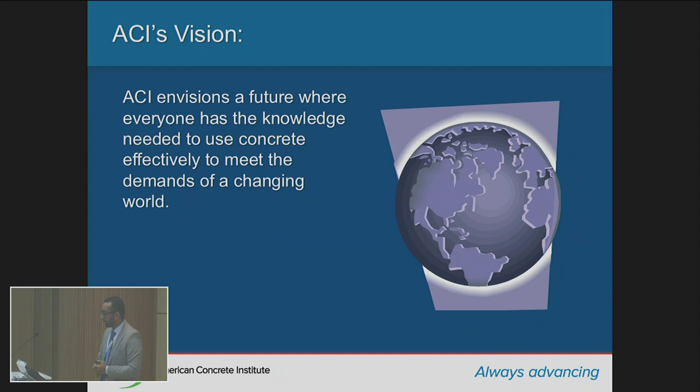ACI envisions a future where everyone has the knowledge needed to use concrete effectively to meet the demand of a changing world.

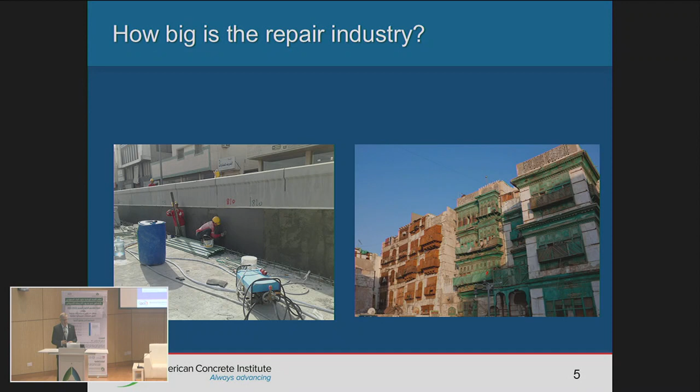So the repair really evolved over many years. Back in the 80s, two studies were published, independent studies, one in the US and one in UK, where people wanted to find out, if we have repair work, how long does that repair work last? Here I'm showing one study done in the UK, looking at about 215 case studies. If you add all those studies, they add up to more than 215, because a structure could have more than one failure or more than one deterioration issue. So a structure would have been documented under more than one cause: could be corrosion, could be freeze-thaw, could be deteriorated concrete, or poor construction.

So here are the structures. Then those structures were repaired using the state-of-the-art at the time of the repair, using conventional methods. And again, a repair could be done under more than one method: could be patching, could be crack injection. So again, it was documented under more than one of those categories. And then after that was done, they observed and checked how long that repair lasts.

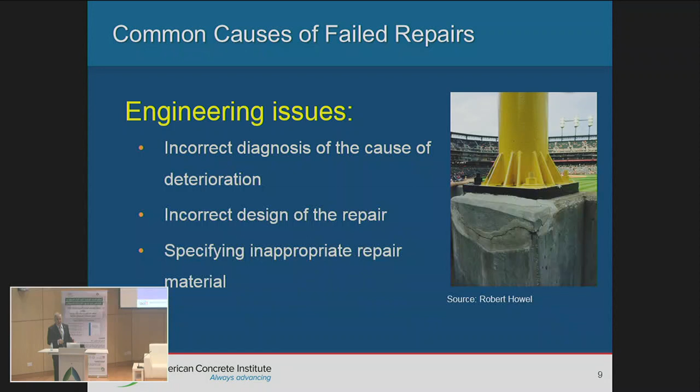The other category they put together was construction issues. Many times the repair is so involved, it's not straightforward. The design itself is not your common design work, so it's non-standard. Sometimes the engineer or contractor would take shortcuts, saying I don't want to follow the contract documents, I want to do it differently.

And I've seen that. One time I was on a job site, and there was this young superintendent. I had prepared the drawings, and I went out there just to inspect. He came to me really happy and proud of himself. He says, I know a lot, I don't really need those drawings to follow, I know how to build it, I don't need to follow those drawings. So I went back to his boss and told him, you better watch over your guy in the field.

As an owner, it's hard for you to see your project or building not working. It's under construction because you're losing revenue. So you want your project and construction to be done like yesterday. So the contractor is being pushed to accelerate the work.

Repair application and workmanship issues. It is also important for the common worker to be trained and aware how to apply that repair work. And we talked about the material differences.

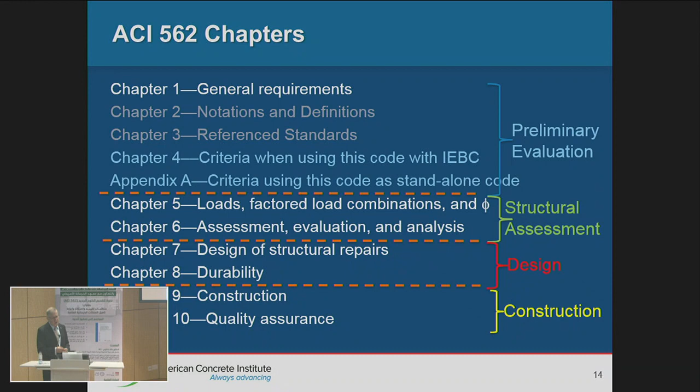Here are the chapters within the code. We have about 10 chapters. You see here, for example, Chapter 4. Chapter 4 is used if the IEBC has been adopted by the authorities. Appendix A is used if it is a standalone code. So the code is divided also into 4 categories. The first few chapters we call the prelim evaluation, where I'm doing the prelim evaluation. Chapters 5 and 6 are for structural assessment, 7 and 8 for design, and 9 and 10 are for construction. I will briefly, because of the limited time, go quickly and highlight what's in every chapter.

This seminar, we give it in the US as over a full day seminar. So here I'm trying to compress the information as much as possible, and I hope I will be able to deliver the message. The intent of any code, any standard, irrespective, is to safeguard the public. It's for the safety and health of the public. That's the first priority of any standard.

The user is the engineer, or in this code, the engineer is mentioned as the licensed design professional. I may be using quite a bit of terminology. What ACI has done is create what we call a terminology explaining what each word means, like a dictionary, but a concrete dictionary. So here's the website address where it's downloadable for free from the ACI website.

The code is applicable to any concrete structure, any building. So it's for foundation, composite members, precast, post tensions. And you see the slab on ground, I have it as a question mark. Slabs on ground are usually, because they are non-safety issues, not considered part of the repair, or the code does not address it. Unless the slab on ground is connected to the structure and transfers, let's say, lateral loading, like part of the lateral system. In that case, or it's a structural slab as self-supported if you have weak soil, then it will be addressed.

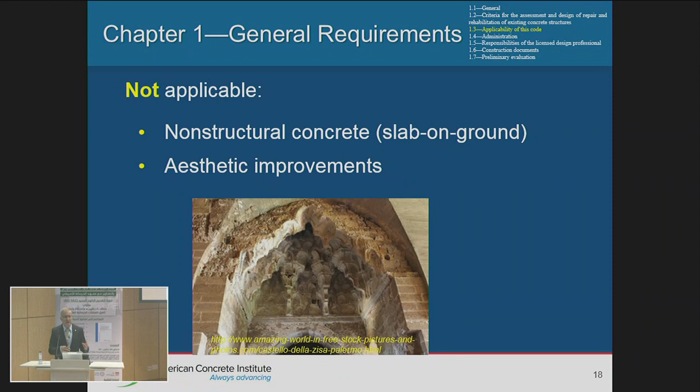But if it's your normal slab on ground, then the code does not really address it. It's also for non-building structures, but has to be concrete, like bridges, tanks, silos, or any concrete structure this code would apply to. It's not applicable to non-structural concrete, or aesthetic improvements, unless those aesthetic improvements may fail, and if it fails, it may hurt somebody. In that case, the code would apply.

Now, if we look at seismic, the code 562 does not address seismic issues for repair. In this case, the code will refer you back to ASCE/SEI 41. I assume everybody here is familiar with ASCE documents? Okay, I see some nodding, so I'm not going to go into it. But ASCE 41, it's also a general document, it's a standard, it's adopted in the IEBC, but in general does not talk about concrete. ACI 369, which is another committee within ACI, did come up with a standard for repair of concrete structures in seismic zones. So ASCE 41 references this document. ACI is referenced in ASCE 41 through 369.

ACI does not want to stifle any advances when it comes to new innovations, construction, design, or analysis. So it allows the engineer to come with new ideas, new methods of design and analysis. But it has to be submitted to the authorities, and the authorities have to approve it.

Otherwise, it's not going to work. So they can show it either by successful use, that it has been used for many years successfully, or by analysis, or by going through a testing program. When I was in California after the Loma Prieta earthquake,

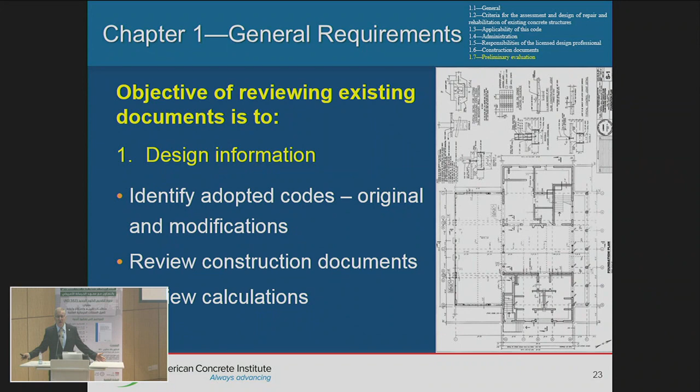Another thing is to also try to collect the material information that was put into this structure. Do you have the concrete mixture components and proportions? Is that available to you? The mill test report for the reinforcement bars. What protection systems were used, and any material that was put into the structure. If you're able to get that information, that will help you in your assessment.

Construction information. Do you have the RFIs, request for information, or any change orders that came about? I was working one time on a project where we had over 200 RFIs. Those would be kept within the company as a reference for future use. Also, any quality control data or inspection reports.

Photos are very important. Nowadays people have those iPhones, they take pictures. If you have those, keep them for your records. Those are very important. There was a project in New York where there were cracks, so the engineer went and looked at the drawings, calculations, and everything looked fine.

But there were cracks, and the cracks really did not match what's on the drawings or the calculations. So it was puzzling. The contractor said, well, I took a few pictures, I have pictures. The engineer jumped at him and said, let me see the pictures. So he took a look, and when the contractor was doing the awnings, they added some steel plates to aid in construction but did not remove them. The cracks really occurred at those steel plates where they had added them. So sometimes photos would help in determining why a structure had failed or cracked.

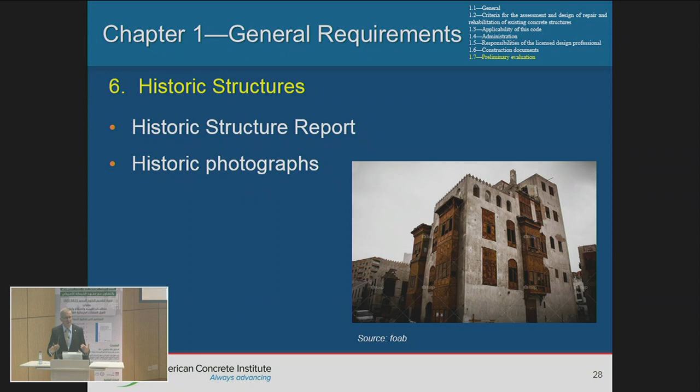Historical structures: as I mentioned earlier, many times we don't have any information on the structures—no drawings, no information, nor photos. In the US, we have what we call historical societies, where they try to gather that information. I'm not sure if such things occur here, but if there's one in existence, it will also be very important to go to those authorities and find out about those historical structures, if there is any information that may help you in the repair if it's needed.

So now the engineer, sitting in the office, has gathered all that information—drawings, reports, calculations—if available, and studied them. Now the next step is to go out and do an as-is check: go to the job site and see what's on the drawings. Is it really what's out there in the field? Do they match? Were there any changes that occurred over the years that were not documented?

For example, member sizes—do they match what's on the drawings? Say the beams or columns were designed as 400 by 400. What's out there in the field? Do they match? Are they 450 by 500, or are they 450 by 350? So do they match? We also have tolerances, right? When we do construction, there are tolerances.

You can also observe if there is any material deterioration. When the engineer designs and the structure is built, you assume everything is to the norms—I shouldn't say perfect, because nothing is perfect, but everything is done as planned. But now, because of deterioration, has the material deteriorated? Are there any signs of distress, like unusual cracks?

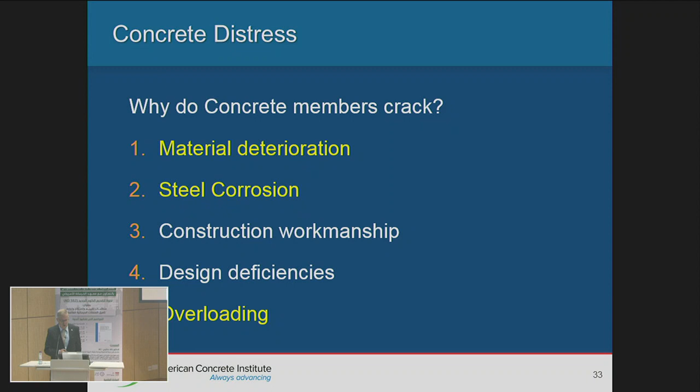So I'm going to step aside a little bit and talk about cracking. Why do concrete members crack? There are several issues: material deterioration, steel corrosion. Maybe you have quite a bit of steel corrosion here on the east and west coast, but I've learned today that you also have it here in Riyadh. So steel corrosion is the number one issue when it comes to concrete repair. We also talked about construction workmanship, design deficiencies, or overloading.

So when we talk about cracking, it's really a very big topic. You may take a full day just to talk about it. So I will only go very quickly and address a few points just to bring the message across. I'll be talking about drying shrinkage, volume change, ASR, and sulfate attack. So in general, why does concrete crack?

I ask, for example, the question - when I'm in the US we say from the East Coast to the West Coast. So if I ask you here, from the East to the West Coast it's about 1,500 kilometers. If you build a concrete highway with no joints, just one continuous placement, and assume there's no friction - just one concrete slab, no friction - and you allow it to shrink, how much do you think it will shrink? Any takers? Just throw a number - 50 meters, 100 meters? It will shrink approximately 600 to 700 meters.

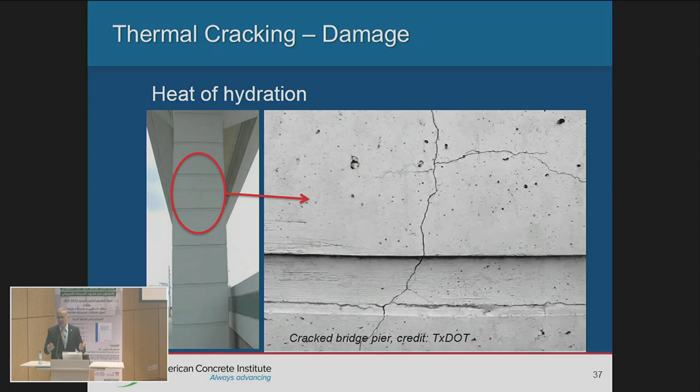We talk about volume change - we have heat of hydration and changes in ambient temperature. When we talk about heat of hydration, it's mainly mass concrete. You see those because the inside of the concrete is still hot, the temperature is hot, whereas the outside, which is in contact with the environment, cools down, so the concrete cracks. There are ACI documents that talk about the requirements of limiting the high temperature and the difference between the external and internal temperature in concrete. There are other methods of how to mitigate those cracks, as talked about here, with the thermal gradient.

The way you find out you have ASR is that gel deposits around the cracks, what we call efflorescence-like gel. This occurs when alkalis react with the silica, creating around the aggregate what we call the alkali silica gel. If there's moisture or water within the mix, or from outside, that gel expands. When it expands it takes volume, and that volume needs space, so it pushes against the concrete and you get those cracks.

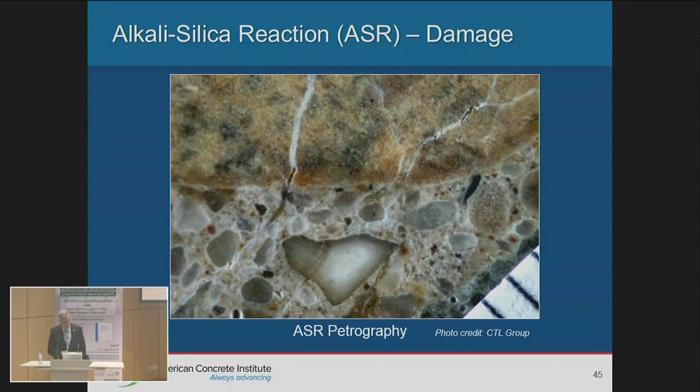Here's a petrographic picture of concrete, and you see that white deposits, or that oozing of material, goes out to the top of the concrete. Now, sulfate attack.

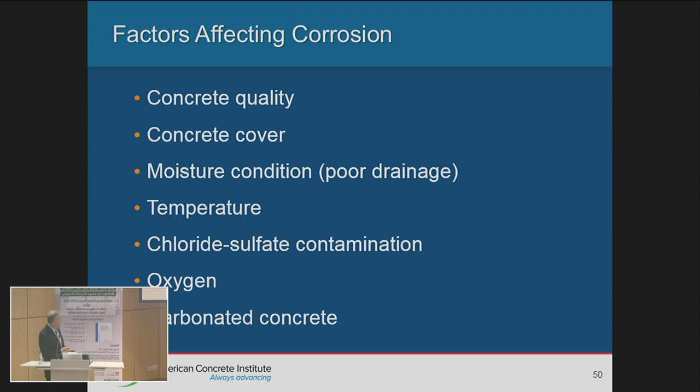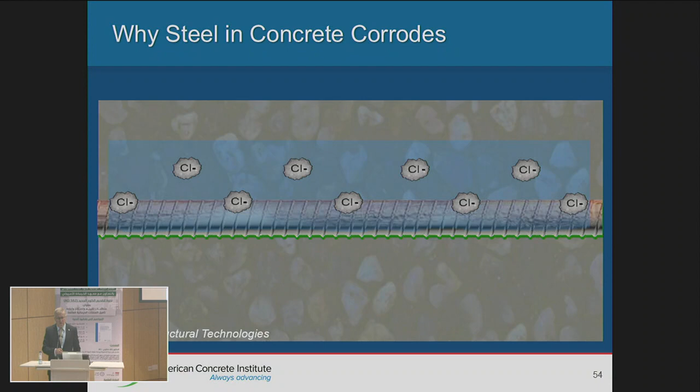If I ask you how fast does carbonation penetrate the concrete - it's about 1 millimeter per year. So if you have 25 millimeter cover, you'd assume about 25 years, give or take, if you have no cracks. If you have good concrete cover, good concrete, it may take 25 years for that carbonation to reach the steel bar. The same thing with chloride - chloride enters the concrete, attacks that film, and the steel bar will corrode.

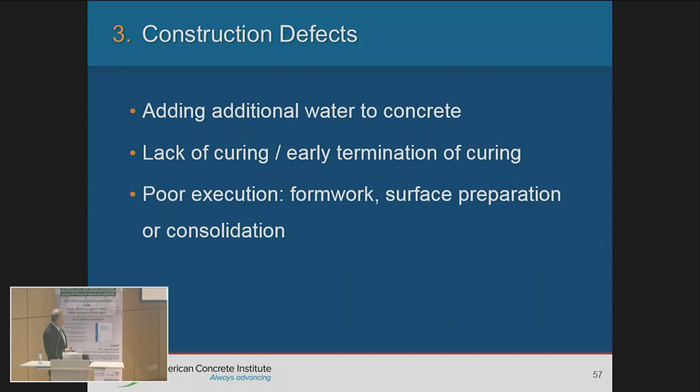Poor execution - here, for example, are pictures I received at the headquarters from a contractor. The engineer told me, 'we removed the forms, and that's what we found. What should we do?' It's a tough issue, right? What should be done? Or when you build and the tolerances are not properly done, not properly erected - those are issues that need to be addressed right up front. So that ended up being quite costly for the contractor to repair.

Sometimes you have design defects. Most of the failures we see are mainly due to shear. Has anybody seen a failure due to flexure, like a beam failing in flexure? Through my experience, I haven't seen any, because flexure is usually properly designed, but shear is still that unknown. Most of the failures that occur are actually based on punching shear.

Last year, there was a failure in Florida, maybe you've heard of it, during construction at the Florida International University. They were putting in a new bridge, still under construction. They were stressing it when it failed over the road. Unfortunately, a few people got more than injured - they passed away. So what they found out is while stressing, the engineer... it's still under litigation, but so far everything is hinting towards poor design.

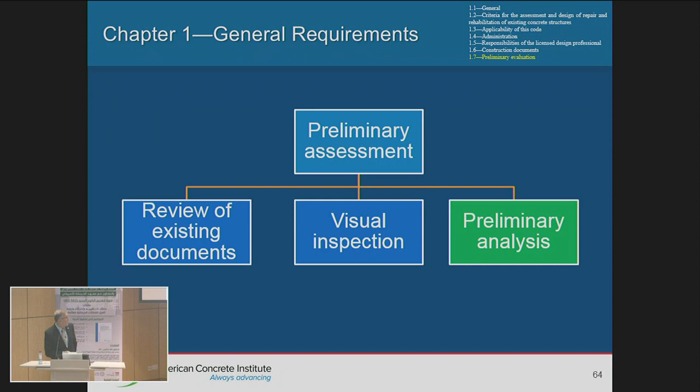As mentioned earlier, when we do our prelim analysis, we are allowed to use either the original building code, if we know to what code the building was built or designed to, or we can use the current building code. You have to check with your jurisdiction, your building department, what code are you using? For example, what code are you using here - 318.14? Okay, so it's the 14 version, so you can use this version.

Or you can go to Appendix A. I will quickly and briefly touch on this Appendix A without going into too much depth, because that takes some time.

The difference between current and original code - it could be that the structure was built to the 1971 code, so it's a different version. The 14 version now has more information, maybe different equations. It's being updated. So when you check your structure based on the original building code, you don't take this updated information into consideration, because the structure, when the engineer built it based on, let's say, 1971 code, did not have that information at that time. So you only design or check it for that information.

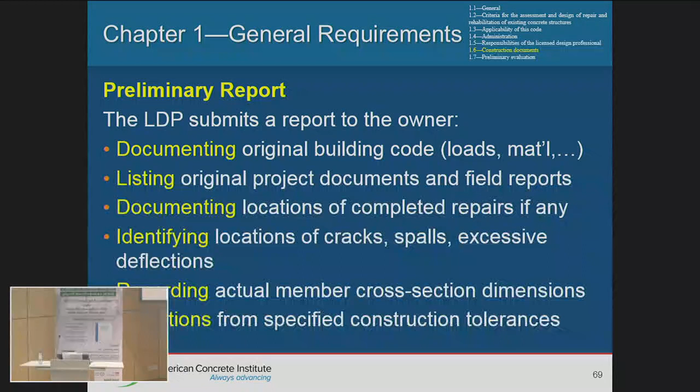Question: when you say it's beyond repair, this will cost a lot of money - so are we going to take the first decision, or do we have to get another opinion before making a decision? Okay, the question is, when I said the structure is inadequate and beyond repair...

The question is, would you just go with that as the final decision, or would you go to a second opinion? When it comes to an engineer taking that decision, he has to be experienced, has to have the know-how, and has done quite a bit of repair work. So yes, you may ask for a second opinion, but as an engineer it's your obligation to determine if the structure is safe or not. And if it's not safe, you can take it out. But yes, you do some investigative work, and I will go into it later. That is just preliminary. The owner may say, why don't you do more investigative work? And I will go into that later.

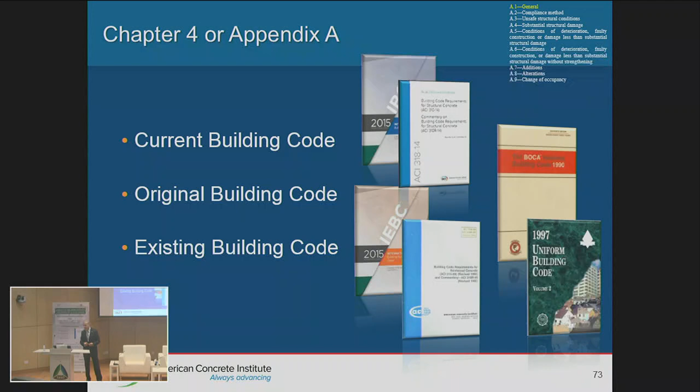Determine the design basis code. I'll go quickly over this, just to give you an idea what code to use. As I mentioned, if the IBC is used, then Chapter 4 is not used, we use Appendix A. This code talks about the current building code, which is the code adopted by the building department. For example, here in the Kingdom of Saudi Arabia, it's the 31814, that's what is being adopted here per my understanding. Then you have the original building code, which could be the UBC, the British standard, the Eurocode, or any standard to which the structure was originally built. And we also have the existing building code, which could be the 562 or the IEBC.

So what is the design basis code? It is defined as the legally adopted code requirements under which the assessment, repairs, and rehabilitation are designed and constructed.

In that chapter we have different categories. For example, we have unsafe structure. What constitutes an unsafe structure? We all know the demand capacity ratio. It tells you if your demand capacity ratio is greater than 1. What capacity are we talking about here? We're talking about the existing capacity, not the original capacity when it was designed, because now we are in a new situation with this structure — we have some deterioration, or we're looking at the actual member sizes. So we look at the capacity based on the current building code, the demand based on the current building code, and the capacity based on the original building code. And if that ratio is greater than 1.5, then my repair is based on the current building code. So then we use the current building code. And as I mentioned, if the structure is unsafe, it has to be reported to the owner and building official as a first step.

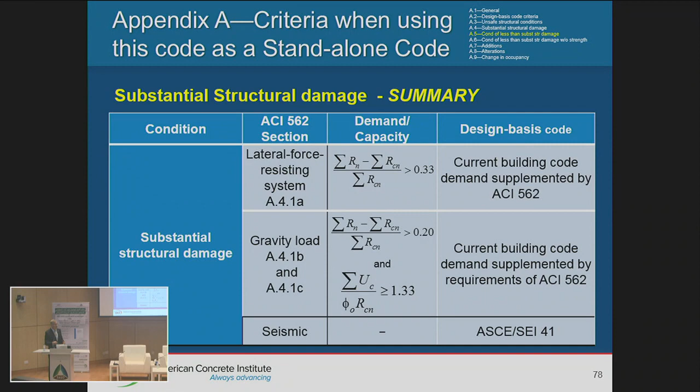So then we go to current building code. For seismic, as mentioned earlier, we go to ASCE 41. Now if we have less than substantial structural damage - if my demand capacity ratio based on the original code is greater than 1, but less than 1.2 or 1.33 - then I can go to the original building code. I don't have to repair my structure to the current building code, which may be expensive or cost prohibitive. Or if it's minor cracking, then I just need to do minor repair.

If you look at additions, alterations, change in occupancy, we do that a lot, right? An owner wants to add one more floor on top, or wants to make changes, add a few bays to the structure, or change a building from an office to a storage, or from residential to an office. So we all know that the live loading will change.

So in this case, the code tells you, if you look at the demand with the addition based on the current code, and it's greater than 5% of the demand of the original building code, then the structure needs to be upgraded using the current building code. There are several issues that you need to check, which would either result in going to the current building code or using the original building code.

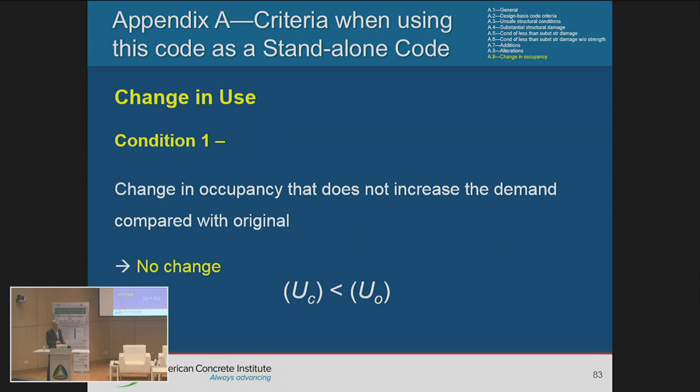If we change occupancy, and the demand based on the current building code is less than the demand based on the original building code, then there's really nothing to be done. Otherwise, we'd go to the current building code.

Now, any new material that you add to your structure, being beam or column, needs to follow which code, do you think? It needs to follow the current building code. So any new material, any new element, any new member that you add to your structure needs to follow the current building code.

You as an engineer may elect not to go through that exercise I showed earlier, of deciding whether to use the current building code or the original building code. You could just forfeit everything and go to the current building code directly. But as I mentioned earlier, that may be expensive, may cost the owner quite a bit of more money.

Let's talk quickly about the load factors, and then we'll take the break. That will take probably 10 minutes.

One thing is that you don't want to mix and match between load factors and reduction factors, because those load factors and reduction factors are calibrated based on statistical analysis to get a certain safety factor. So if you are working the structure, checking it, look at the original building code and the current building code together. Don't take, for example, the load factors from the original building code and the reduction factors from the current building code, because then you have an issue.

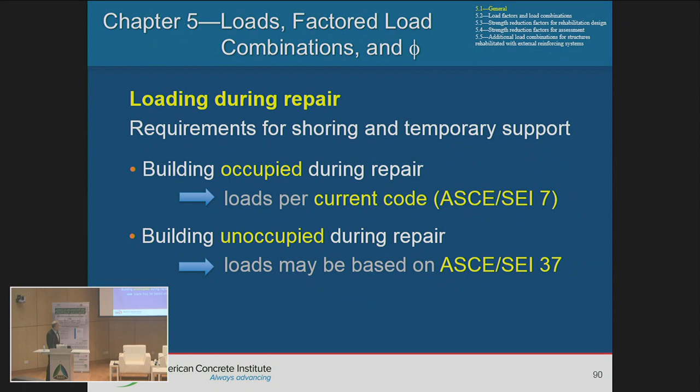And seismic, it's 41. Again, when we're looking at demand capacity ratio, we need to satisfy this inequality. We have two reduction factors in the code, here in 562. We have this reduction factor, which is based on no testing, no providing any evaluation. Or if I'm doing testing, if I've tested the material, I know my cross-section, my member sizes, then the code, because now I have higher reliability, I'm actually working with the actual member sizes and actual material properties. The code increases those reduction factors because of higher reliability.

The code allows for external strengthening, being post-tensioning or FRP. So the code here now allows FRP for external strengthening. If we look at post-tensioning, we have what we call direct attachment to the concrete, so we have positive attachment. But when you look at FRP, it's based on epoxy, so there are issues with non-mechanical strengthening systems. So the code has two requirements that need to be satisfied in order to use the non-mechanical strengthening system.

One of them is this first equation, the S stands for snow. You don't have snow here, so we have to take this equation out. But look at the other equation: without strengthening, so without the FRP, the structure has to maintain this load, the 1.1 dead load plus 3/4 the live load. If it satisfies this without the FRP - because if you have the FRP, you may lose it due to vandalism or whatever reason - you need to make sure the structure can still maintain sufficient load to alert the owner or occupants that something is wrong so they can take emergency action.

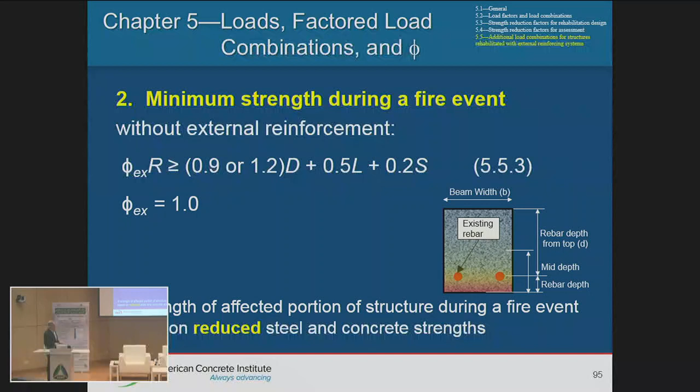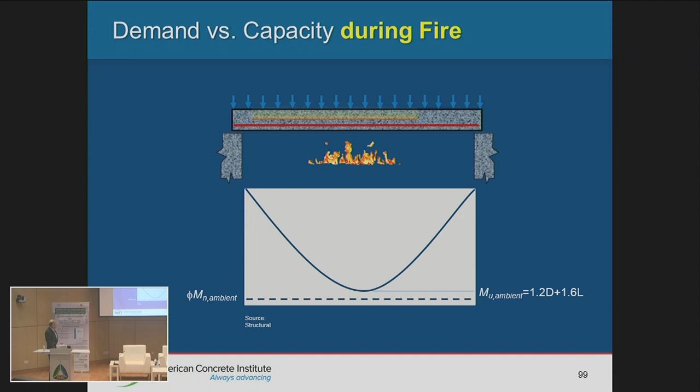Beyond that, there is also deterioration. So let's take a quick look at this member. When we design, your demand is this graph, which is 1.2 dead plus 1.6 live, and your capacity is per the code as shown here. If we have fire, the capacity decreases, it reaches here. As mentioned earlier, in order to use the FRP, you need to maintain a demand such that when you lose your FRP, the structure can still maintain this load. Any questions to this point?

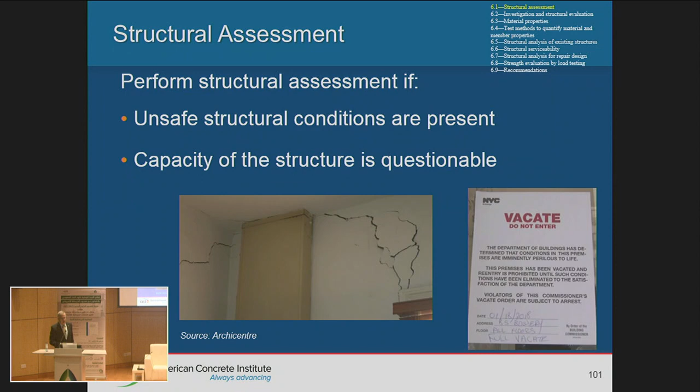So now let's go into Chapter 6, although he says Module 4, but we'll talk about Chapter 6. We'll talk about assessment, evaluation, and analysis. Again, we need to perform structural assessment if the structure is unsafe or if the capacity of the structure is questionable. So when you look at the structural assessment, we have in-place conditions, we do the evaluation, and then the rehab strategies.

We talked about review of available documents, and we did the visual survey. Now, what about the material properties? How would we go about those? How would we determine what are the actual material properties in the structure? Do we do destructive or non-destructive testing? And how do we perform the analysis?

So one thing is, if we're looking at the structure and we see deterioration or distress in the material properties, then there's only one way to do it, and that's by doing physical testing. Because whatever the drawings tell you, well, the concrete strength is 40 MPa, it doesn't really do you any good because the concrete has deteriorated. So you need to find the actual material properties.

If it has not deteriorated, then you have two options. If you have the actual contract documents, you can use whatever material is listed on those documents, but preferably do the physical testing because, again, you will get the as-is condition. We all know when we place the concrete, it will gain strength with time, right? So we need to find out the actual concrete strength.

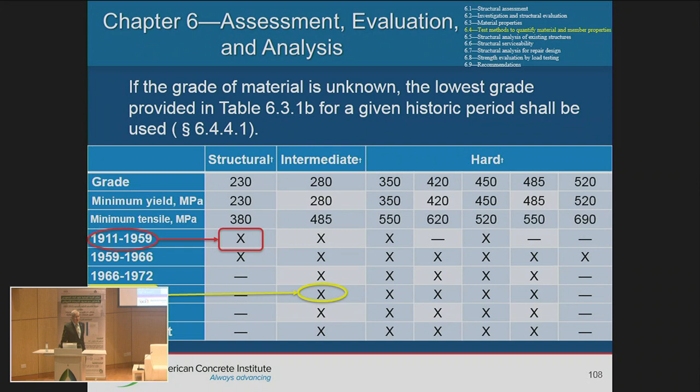Or doing destructive or non-destructive testing. The code allows both - actually, let me rephrase that. Non-destructive testing by itself is not acceptable. You cannot rely just on non-destructive testing. You have to do destructive testing, and then you calibrate your non-destructive equipment against those actual tests that were performed.

So if you look at in-place concrete strength testing, usually those methods are quick, easy to do, and don't take much time, and are inexpensive. But calibration is required. For example, if we take the Rebound Hammer, it's inexpensive - the advantage is it's inexpensive and a quick method. But you know it's very unreliable. It depends - if you apply it vertically or at an incline, it would give you different test results.

If there are different types of cement, and if you hit the cement paste versus the aggregate, it will also give you different test results. So this tool may be good to provide a comparison between the material in this location versus that - so it's just a comparison between different material within a structure, but it does not give you the actual concrete strength.

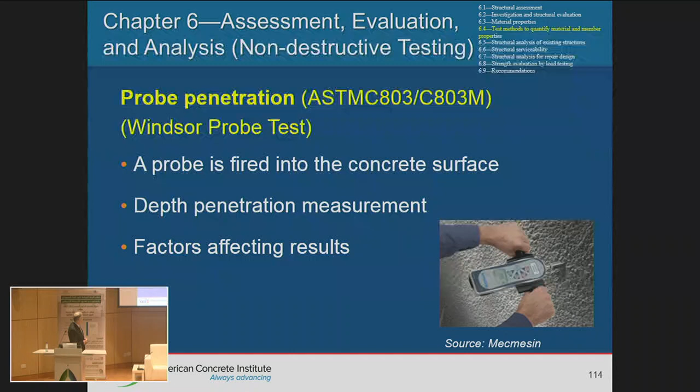The advantages are that it is simple to operate, it's durable in maintenance, and it's insensitive to surface condition.

The limitations are that your member has to be a minimum of 100 millimeters, and it's not recommended for lightweight concrete, nor for strength lower than 28 MPa. Also, don't use it on edges and corners.

Do you know why, or can you guess why not? Because you're shooting that pin right into the concrete, you may spall it or you might crack it.

So that's also another method that is quick. And as I mentioned, those are acceptable only after you have calibrated it. So you cannot use it just by itself.

You take cores, you test those cores, you get your actual concrete strength, and then you calibrate that equipment against those tested cores. Next is the pull-off test.

That is one of the most used methods to test overlays. So if you have an overlay, you get what you call the direct tensile strength.

You have this cylinder where you adhere it to the concrete, then you drill around it, and then you pull. You'd like to have your failure within the substrate, which is the existing concrete.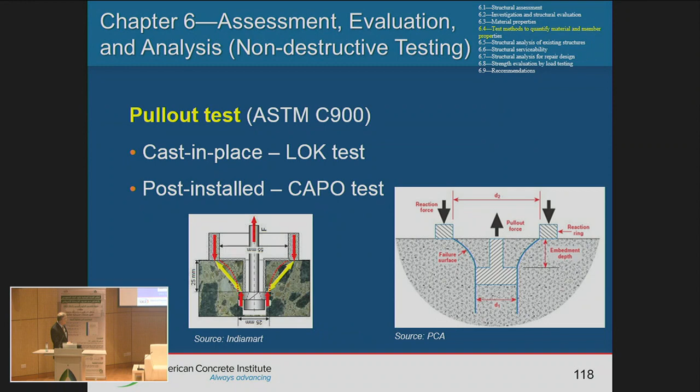And there is the chart that you get from the manufacturers, which will determine your concrete strength from your pull-out force, and that will reflect your concrete compressive strength.

You also have the stress wave method, where you have the input here and the receiver here, and that will give you an indication of the approximate in-place strength, whether you have corrosion in your bars or not.

It can also tell you if there are any voids, honeycomb voids, or indicate the member thickness.

This is a very old method. Do you still use that? What you call chain dragging - is it being used here? It's being used quite a bit in the US to find out, on bridges, any delamination.

You take a chain and you drag it over the bridge, over the road. It's inexpensive, it's just done by labor, but just by the sound of it, if it gives you a hollow sound, that means there is delamination.

Again, it's simple, its mapping is not that difficult, and the training required is limited, not much of a training. And it's quick. The disadvantages are that it cannot pick up the onset of delamination.

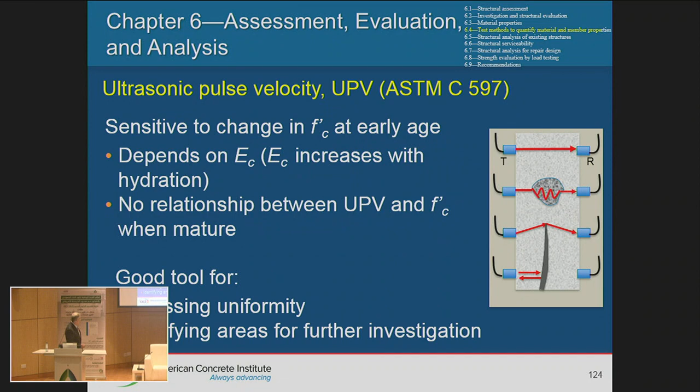Or if you have a crack, same effect. Here's a picture showing where you have the transducer, here's the receiver, or vice versa.

And it's affected by the aggregate type, amount of aggregate, and the bar layout. Bar location is always important to know when you're doing any repair, to determine where your bars are, right? And a quick, easy, and inexpensive instrument for that is the cover meter.

So with the cover meter, it's not usually that easy to determine what you call the bar size. Unless, for example, you chip a little bit, you determine your depth, and you find out what your bar diameter is, then based on that relationship, you can determine the other bar sizes by estimating it.

The advantages: high accuracy, not influenced by moisture, and actually low cost. The limitations: if your bars are at a depth greater than 100 millimeters, or if you have multiple layers of bars, it cannot identify that. Also, if you have a lot of bars, determining the size and spacing of those bars may be difficult.

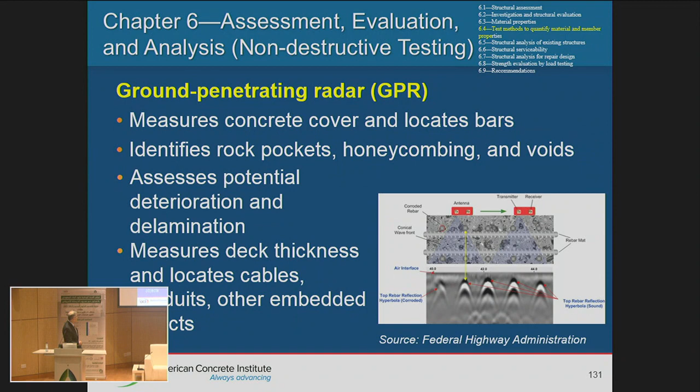So that will give you sort of a map of the whole layout of the reinforcement. It's fast, reliable, and repeatable.

The limitations: again, it requires trained personnel, so the people doing it need to be trained on that equipment. Weather, if it's cold - you don't have that issue here, you don't have de-icing - may also affect it. And it's influenced by depth and spacing of bars. Again, if the bars are deep below the surface, or if they are closely spaced, that will affect the reading.

Durability of concrete - we talked about carbonation. If you take a sample and apply this material, the phenolphthalein test, on the core, if it changes and becomes colorless, that means there is carbonation, and you can determine how far the carbonation has penetrated into your concrete. But if it turns pink or reddish, that means you don't have carbonation in your concrete.

Again, going back here, we have quite a bit of documents, ACI documents, that talk in much more depth about those tests, how to perform them, and the advantages and disadvantages of those tests.

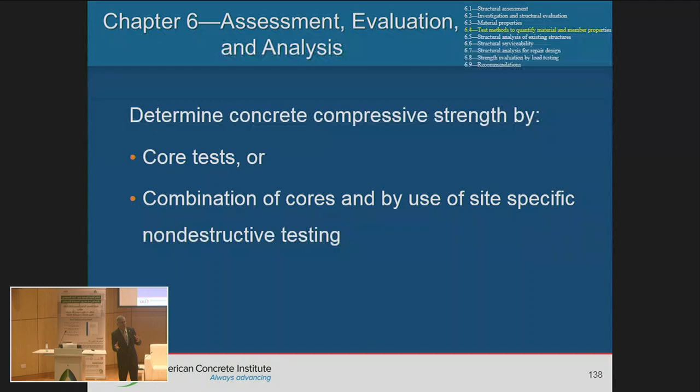Let's take a look at destructive testing. As mentioned earlier, destructive testing is the only method acceptable in the code, but you can supplement it with non-destructive testing. So non-destructive testing by itself is not acceptable, but you can correlate between the non-destructive and destructive testing. The code actually encourages doing non-destructive testing after you have done some destructive testing. The reason is, if you just rely on destructive testing and take a lot of samples, you may jeopardize the integrity of your structure - it becomes more like a Swiss cheese, because taking too many samples will weaken your structure.

So cores have to be taken from sound concrete. If you see a crack, don't try to take your cores where the crack is just to see what's exactly there - no. When you take your cores, take them away from cracks, where you have sound concrete - that's where you take your cores from. Locate your bars before taking your cores; the core should not include any reinforcement. And when it comes to concrete, use a minimum of 3 cores. If you take the cores, let's say in a column or wall, where would you take them - from the top, bottom, or from the middle?

Any volunteers? Where should you take the core, and why? The middle is right.

Middle is correct. What they found is that if you take it at the top, your concrete strength is about 15% lower. If you take it at the bottom, it's about 10% higher. Why? Because when you place concrete, most of the aggregates settle below, giving denser, stronger concrete at the bottom. At the top, you don't have much aggregate, so you have lower quality concrete. So the best place to take your cores is the middle.

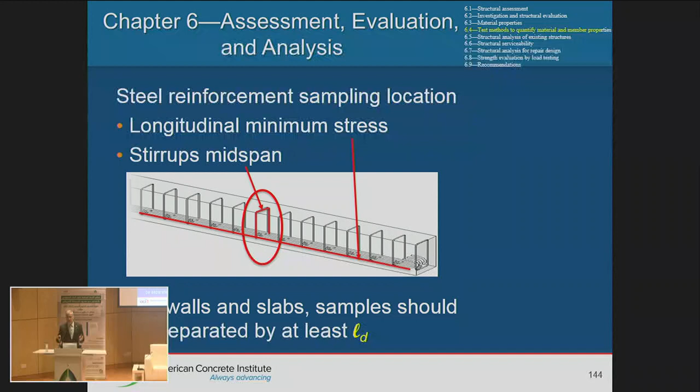For walls or slabs, if you take samples from 2 or 3 bars next to each other, keep a difference of about the development length between them. Take a minimum of 3 samples from different segments and from the members being evaluated.

For steel, we also have an equation shown here, with Fy bar being the average from the samples you've tested—that gives your equivalent yield strength from that equation. I won't go into detail, but again, with a very high number of samples, your equivalent yield strength would be about 85%.

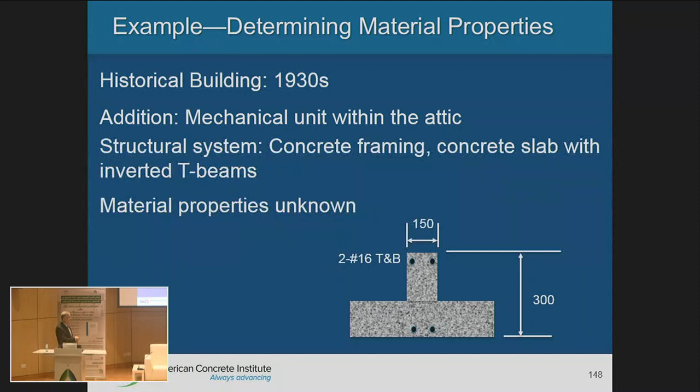Let me take an example and show how we use these equations with the reduction factors. This is an actual example: a structure built in the 1930s, an inverted T. Nothing is wrong with the structure, but the owner wants to add a mechanical unit. As I mentioned, there are no drawings, nothing. So they came in, measured the member sizes, used a cover meter and chipped away, and found 2 number 16 bars top and bottom. Material properties are unknown.

So the engineer has to do some evaluation. Rather than jumping directly into testing, he said: let me check with the historical data first. Am I fine? Do I need to go further? If my analysis with historical data shows the structure is fine, I can save the owner the hazard of doing destructive testing.

So I went to that table. It was built in the 30s, so the concrete strength is 14 MPa. Going to the steel, again from the 30s, the lowest yield strength is 230. Because he hasn't done the actual material property testing, although he checked the member sizes, we use the lower reduction factors: 0.9 and 0.75 for flexure and shear, respectively.

If I calculate my demand capacity ratio based on the historical data, it's 0.9—less than 1, which means the structure is okay, safe, and satisfies the original code requirements. But when I added the new unit, it came out to 1.27, much higher. That means I need to reinforce the structure.

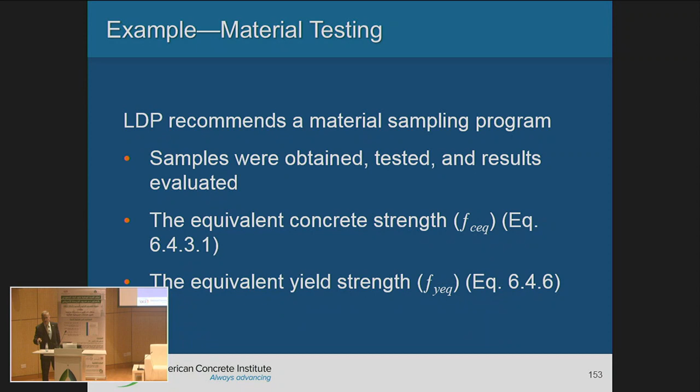Rather than going in and strengthening the structure, the engineer said, let me do some testing, let me go through a testing protocol. So they took 8 samples, and found the average is 42.9. Using those values, the equivalent concrete compressive strength was 35. If you look at it, it's more than twice the historical data. So with the testing, you get a little bit of advantage.

Now let's go to the steel. Took 4 samples, and the equivalent yield strength is 229, which is very close to the historical value, which was 230. And by the way, this is an actual project.

Now going back, because I have the actual member sizes and I determined my material properties, now I can use the higher reduction factors. See how the code now works? Because I have my material properties and my member sizes, I can use the higher reduction factors. Now I did my demand capacity ratio, it's 1.06, so it's still greater than 1.

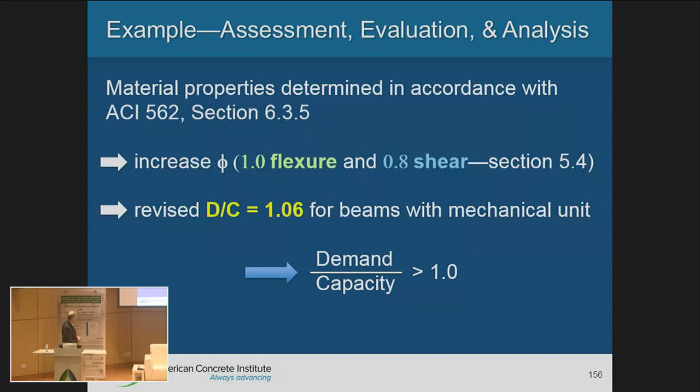If you remember when we talked earlier in Chapter 4 about determining the design basis code, if we have a change in capacity and an increase in loading, then we use the current building code. So the engineer now is justified to strengthen the structure. But rather than strengthening it to the level of 1.27, the engineer now only needs to strengthen by that difference of 6%. So the strengthening is much less.

But because it is very close to 1, the engineer said, if I use more test data, I might improve my probability. As you remember, we have that K sub S or K sub C. With an increase in samples, it will decrease, and give me a higher equivalent number. For the steel, with 4 samples it was 2.3. Now he took 2 more, taking it to 6, so that K sub S dropped to 1.7, and the equivalent yield strength increased from 230 to 248.

So doing my design capacity ratio, it's less than 1, and I don't need to do any reinforcement anymore.

So what did the engineer do here? He not only saved the owner a lot of money, which makes the owner very happy, but also saved downtime, because when the structure is closed, the owner is losing revenue, losing money. So by going through this exercise, maybe it did cost the owner a little bit of money for the engineering and for the testing, but overall it saved the owner a lot of money when it comes to repair work, because that's costly. On top of that, it also saved him downtime because the structure does not need to be closed.

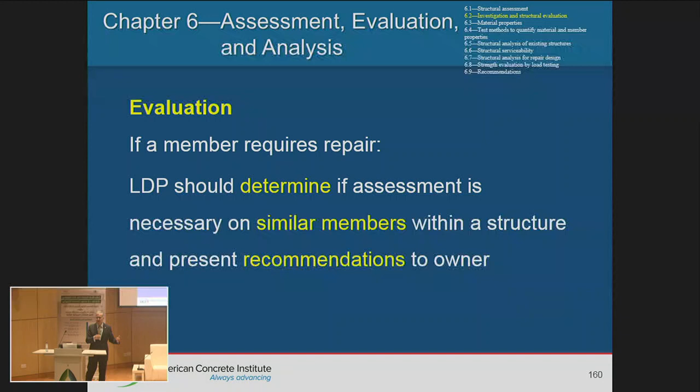We'll have to evaluate the different causes of failure, look at all the remedial measures, and also predict the future deterioration of the repaired or unrepaired structures. So if a member requires repair, the engineer also has to determine if similar members need to be repaired. Maybe the deterioration or distress is in that particular member, but other members with similar design, similar capacity, similar loading - do those also need to be repaired? That's also a judgment call by the engineer.

Let's talk about rehab strategies. We talked about those different steps. Now we need to perform the analysis. So when the engineer performs the analysis, many times the engineer would go, well, here I have the drawings, I have the member sizes, and they model them as is. Well, what the engineer needs to do when doing the analysis is to reflect what's actually there in the field.

Needs to model the actual structure. If there is any cracking, we'll need to show that there is lower stiffness. If they have any additional members, added columns or removed columns, all those need to be reflected in the model, putting in the as-measured dimensions and the actual material properties. So the model has to reflect the actual structure that is existing.

Also, if there were any previous repairs to the structure or modifications, those need to be included. You have to have that continuous load path.

When you're doing the analysis, you have to check how the repair is going to be performed. You have to look at the construction sequences: adding material, removing material, reducing member sizes. For example, if you're repairing a column, you first have to chip and remove some of the material from the concrete, which reduces the cross-section. That needs to be shown or reflected in your model, those different steps as you progress.

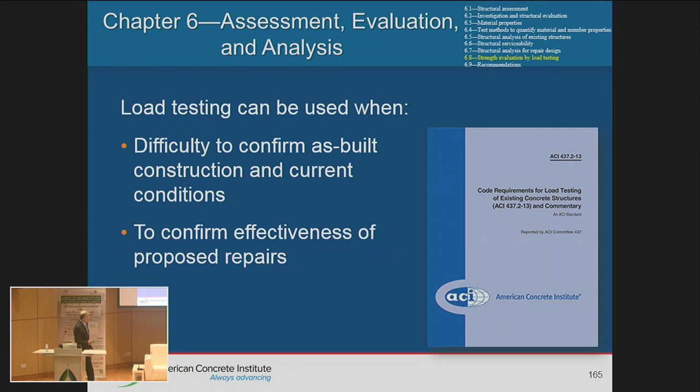Let's talk about design of structural strength, structural repairs. So what is the purpose of repair? The primary objective is to restore the structure's integrity, safety, and serviceability.

When you put the structure together, first of all, people need to be sure it is safe. That's your first thing, safety is number one. Then serviceability. You don't want to walk on a slab where it's bouncy, or feel the structure moving in high wind. So you need serviceability and safety, and definitely the integrity goes with it. We need to satisfy that my capacity is greater than my demand.

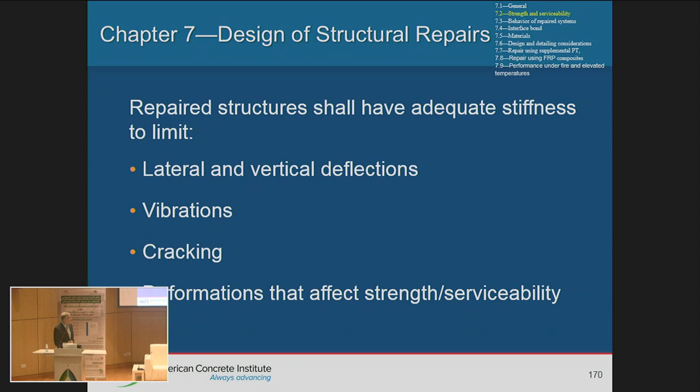You have to check the lateral and vertical deflections, vibrations, cracking, and so forth. So all those need to be addressed. The structure needs to have adequate stiffness to limit deflections, vibrations, and cracking.

When we look at structures, the most important thing is, where do failures usually occur? Usually at the joints. That's usually the weak point in any structure. The joints are the main thing you need to look at to ensure the structure is working together properly. As I mentioned earlier, during my 20 years of experience, I haven't seen any structure failing in flexure, or heard of any structure with flexural issues.

But when it comes to connections, if you look at earthquakes, where do most of the failures occur? Really at the joints. So when you're adding new members to a structure, the connection of that new member to the existing structure is important. You need to ensure it will transfer the load properly from the new member to the existing, or from the existing to the new.

When we look at serviceability, we have to look at service loads. When it comes to repair, we have to look at service and ultimate loads. And also for non-structural elements that impose life safety concerns, we have to look at service and ultimate.

As I mentioned, when we look at the repair, when you're adding an overlay or new material to an existing material, the repair is as good as your surface preparation. So if the surface is not well prepared, you're not going to get a good repair. Your repair is going to fail.

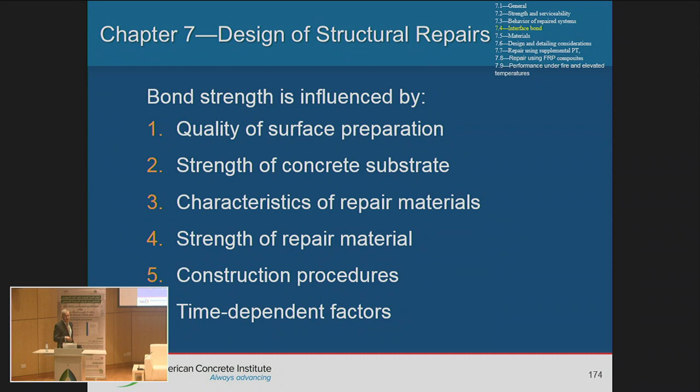it for a couple hours, and then come back to put your overlay, what will happen with that epoxy? It will solidify, right? It will lose its stickiness or its bonding. So when you come with the overlay, will it bond to the existing? It will not. So you'll get that delamination, or it will not work together. So that's what's meant by the time factor. So when you apply whatever material, you need to go directly or quickly to adding your overlay.

Let's look at a bond example, that's also from an actual project in Chicago. What we have here is a 9-story building structure built in 1971. It has a 200 millimeter thick lightweight concrete slab. The concrete strength is 26 MPa. Steel is 420 MPa.

As mentioned, Chicago means there is snow. Snow means they spray salt. Salt is carried by the cars into the parking garage. When it goes into the parking garage, there is chloride contamination. That means steel corrodes.

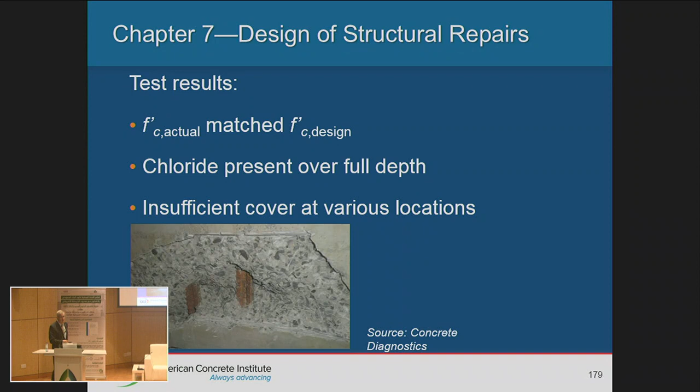Well, the concrete strength, the actual matched the design, so that's fine. So we're using the 25.9 or 26. The chloride was found to be over the full depth, and in some cases they found that the cover was not sufficient. For example, they required 25 millimeters, it was less than that. So it did not satisfy the code requirements of that time.

So the engineer's solution was to remove about 90 millimeters of that top deck of the slab, which is about half the slab thickness. So they took about half the slab thickness away, and they wanted to replace it with bonded lightweight concrete.

So they want to remove all the deteriorated concrete, clean the surface by blasting or water blasting, and ensure that the surface is properly roughened. When we talk about roughening, what we mean is the difference between the high point and low point of the roughened surface. So you need to have what you call highs and valleys, so that when you add your overlay, they bond properly together.

So you don't want it smooth when you remove concrete. If it's smooth, that means it's not good surface preparation. Good surface preparation is when you have those highs and lows in your concrete. And a good number is about 6 millimeters. And all the loose material needs to be removed.

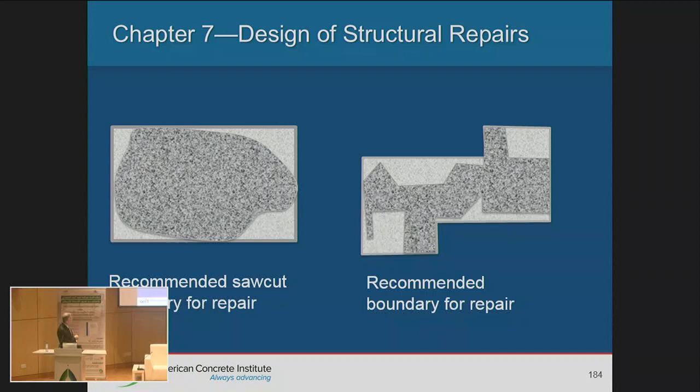Or you can do chipping. Chipping is another method, and those equipments are really big and expensive, and they may not work well, or you may damage them if you have reinforcement, because they have steel teeth that grab the concrete and chip it away. So if you have steel that is close to the top, you may pull some of the steel out with you, which may damage the equipment, which is expensive.

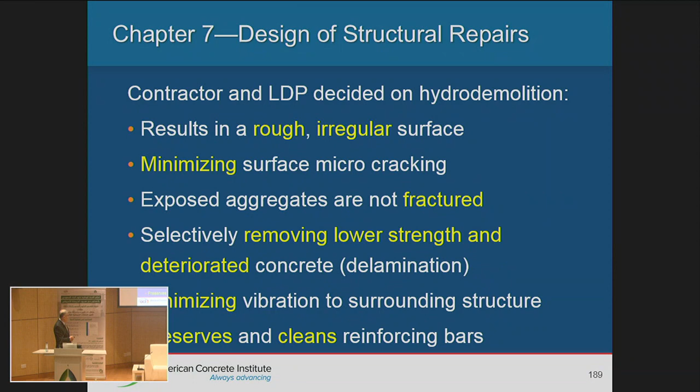So the contractor decided to go with hydro demolition, which results in a rough, irregular surface. It minimizes surface micro cracking and exposes the aggregate so it's not fractured. If you have low strength concrete, it will remove that concrete, minimize vibration to surrounding structures, and preserve and clean reinforcing bars, which is important. Because of removing 90 millimeters, you're exposing your reinforcement, and since the bars were corroded, hydro demolition will clean those bars and preserve them without damage.

So the engineer was happy. That's what he was looking for, that number. Because if you look at the low results, the failure was at the surface of the substrate concrete, so it wasn't really at the interface.

When they did some testing, they found tests that were very low, 0.22, and at the interface, 0.54 - very low test results. That was alarming, so the engineer stopped the work and tried to figure out why they got those low test results. They took a few cores and took them to the petrograph to analyze.

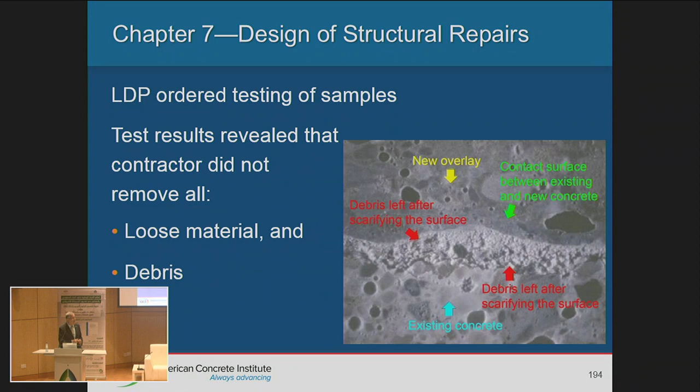What did they find out? If you look at this picture, this is the existing concrete, and this is the new concrete, the overlay. What do we see here? They found debris, loose material, which created a debonding between the new and existing concrete. That means the contractor did not do a good job of cleaning the concrete after removing it.

So the work was stopped, meetings were held, and the outcome was that the contractor needs to do a better job and needs more supervision. So they added more inspectors to closely examine the work.

So they continued and did some more tests after a while, and found that the test results increased, and the engineer was happy with those results. Because when we had the low results, it was in the substrate, not really at the interface. So the engineer was happy with the test results, and the project continued.

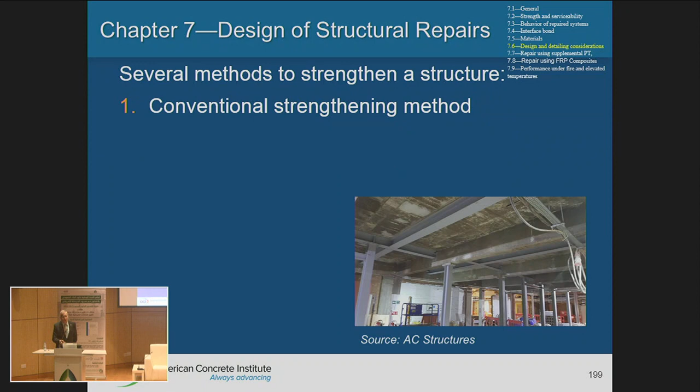When we look at strengthening or methods of strengthening, what is allowed by this code? We can use conventional strengthening methods, concrete enlargement, or steel enlargement. Sometimes concrete and concrete work very well together, but sometimes it's easier to use steel.

But you also have to look at the structure itself - can I bring those big steel members into my structure? The maneuverability or access into the structure. Maybe steel structures won't work, so my strengthening has to be done with enlarged concrete sections. Post-tensioning is also acceptable when it comes to repair, as is external post-tensioning.

Or FRP. Is FRP used here?

But not for repair. You use it for, okay.

So FRP is another material that can be used for repair. It comes in fabric, bars, or plates. When you use it as bars, we call it NSM, near surface mounted, where you create very narrow slots in your member. You fill it with epoxy and put these bars in.

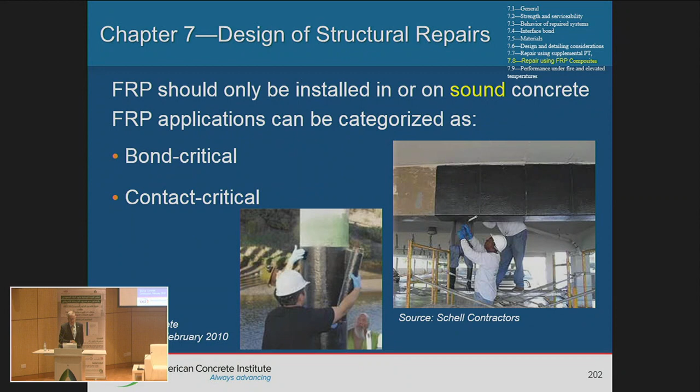ACI has also different documents when it comes to FRP - externally bonded, internal, or internal PT. By the way, as an ACI member, all those guides and reports are free to download.

So we talked about repair here. When it comes to analysis, you have to do the same thing as with the repair.

Now we talk about durability. What is durability? It is defined in 365 as the ability of a material or structure to resist weathering action, chemical attack, abrasion, and other conditions of service, and maintain serviceability over a specified time or service life. In other words, I have my material properties in that element or structure, and those properties are maintained over that period of time, irrespective of what the environment is imposing on that material.

I mentioned earlier today that 201 is writing a standard on durability. 365 is also writing a standard, started at the same time, to determine service life prediction.

Actually, that came also from one of those seminars we were doing. Somebody came and said, well, if I'm designing, am I designing for 80 years or 100 years? How could I ensure that my structure will last that long? I need something in writing. I told him, I don't know.

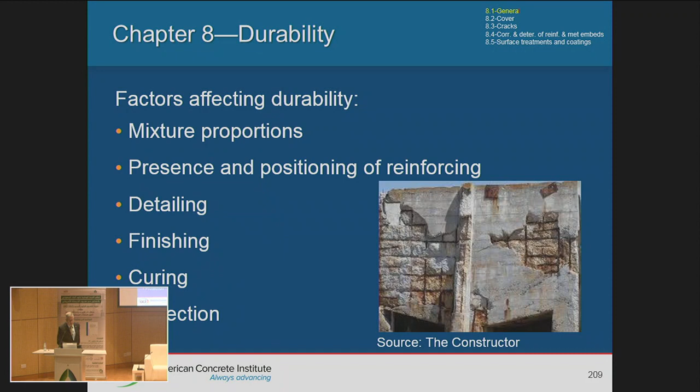The design service life is really established by the engineer in consultation with the owner. Let's say the owner has a building and only wants to use it for another 10 years, then wants to demolish it and build a new building. It doesn't make sense for the engineer to design the repair work to last another 50 years if the owner only wants it for 10 years. So this needs to be discussed between the engineer and the owner about the desired design service life, but in all cases you have to maintain the strength, safety, and serviceability.

So let's talk about causes of degradation. We talked about the mechanical and chemical causes - we addressed those. Compatibility of materials, and cover. Cover is important because if you don't have enough cover, like in this case with that column, you notice the steel started corroding.

Looking at cracks - there are different types of cracks, and we have to look at their causes. Why did they occur? Is it because of shrinkage, temperature cracks, or structural cracks due to loading, settlement? Are they active or dormant? What's the size, orientation, the width? All that will tell me something. If they're straight up, they may not be as critical as if they are inclined, especially at the support, or if you see cracks around the column versus cracks away from the column in the midspan.

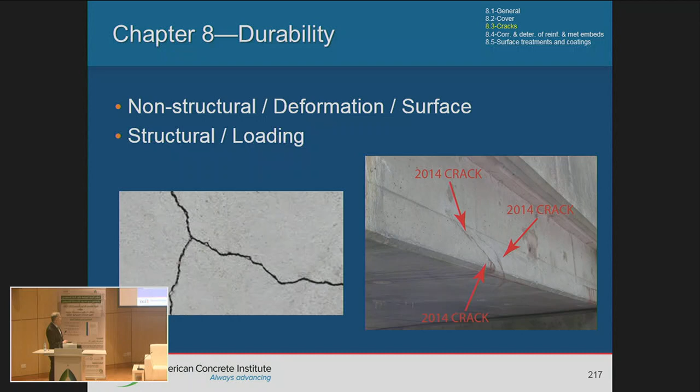That needs to be addressed, and that will affect your strength. As mentioned, we need to look at whether it's active or dormant. One way is to measure the width of the crack over periods of time, or put a device and see how the crack is moving. Active cracks mean we need to take action - it needs to be addressed and corrected. Dormant cracks mean the crack is not moving, there's no deterioration or movement in the structure, but a dormant crack could become an active crack in the future.

Corrosion, as mentioned earlier, is one of the biggest issues that affects the construction industry and buildings in general, and it costs a lot of money, not only for repair but also in downtime and revenue. So if you have corrosion in your bars and do not take care of it or remove the source of corrosion, it will continue even if you repair it.

For example, if you have spalling in your concrete because of corrosion, and the owner just brings in a contractor to patch it, what will happen? That repair will fail, right? Because you haven't really taken care of the corrosion. That repair will fail, so you need to address corrosion before repairing that element.

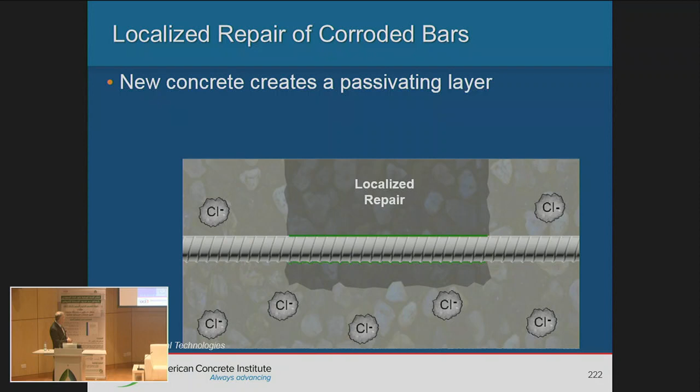But if you have contamination within the concrete outside that area, because here the patched concrete has high pH, but the surrounding concrete, if it's contaminated with chloride or carbonate, that will accelerate the corrosion of the bar outside that area. What you'll see on the surface of the concrete is ring cracks, or what we call ring effects or halo effects—round cracks around that repair area.

Surface treatment: if you have corrosion, the best thing is to take the whole thing out. But that may not be practical, may be expensive, and sometimes it's not necessary. So there are other ways of protecting your steel, using non-metallic coating, metallic coating, inhibitors, or electrochemical protection. I will go briefly over each one of them.

I will continue, right, to the end. Okay, great, so I will not take much time here.

If we look at sealers, sealers will block the chloride from entering, but they don't block CO2 or address existing contamination. So the steel bar will continue corroding. It may delay the failure of the structure, prolong its life for a short period because of that sealer—it's preventing the chloride, but as mentioned, it does not prevent the carbon dioxide or carbonate and whatever is already inside that concrete.

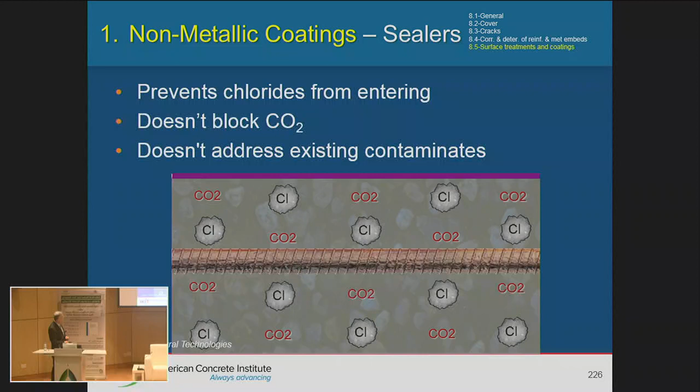The same thing with the membrane. It will protect the concrete from external carbonate and chloride, and also protect it from water or moisture entering, but it will not protect the concrete from contamination that's already existing within it, so the steel bar will continue corroding.

There is also that product called the migrating corrosion inhibitor. Has anybody used it or is familiar with it? Just raise your hand if you're familiar with it or it's been used for repair. Okay, how does it work? Did it work for you, or has it worked fine? Did it protect the reinforcement?

Some people say it really works great, others say so and so. I myself don't know, but some people said if you applied it, it works great. Those corrosion inhibitors work great with new concrete—if you have it within your mix as an admixture, it protects the concrete. But applying it at the surface, what I've been told is that, as far as that product migrating down into the concrete, it may not be uniform, and you don't know where it stops. It may continue beyond where your layer of bars is, so it does not provide the protection. So I don't have the data, and I did talk to some material suppliers and told them, if you have any data, please share it with us.

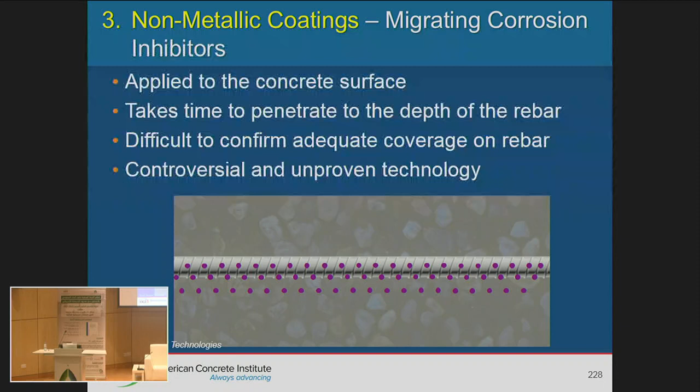Well, if you remember, I talked about the equations. I said if the code, without the FRP, satisfies 1.2 dead plus 0.5 live, then you don't need to provide any fire protection. If not, then you need to provide fire protection.

Thank you so much. You're welcome. Any other questions before I continue?

Thank you, Doctor, for this, I would say, amazing lecture. Thank you. Full and easy to understand.

I have a question with regards to qualifications for engineers to be able to assess the building. We have some certifications through ACI. With regards to assessment and repairing, do we have such a certification or educational program that covers this area for engineers? As you mentioned, we were not educated in the university on this, so there must be a way.

The education that we have when it comes to repair is through seminars like these. We're doing quite a few of those in the US. We have full-day seminars where we talk to engineers. We also have webinars - for example, you can go to the ACI website and listen to some of those lectures.

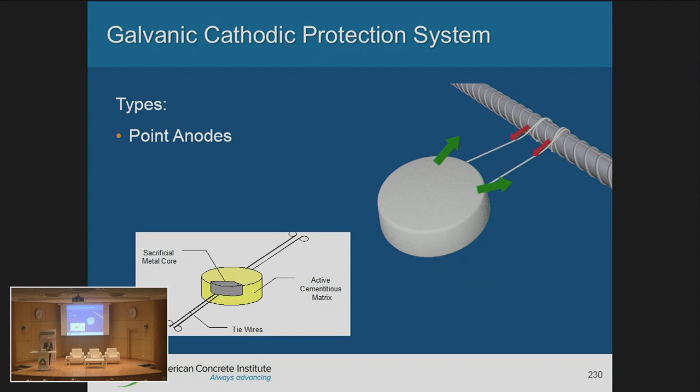We have this embedded mesh anode, where you embed it within the concrete and it provides continuous energy. You have the surface mounted, where you melt a metallic element and press it on top of the surface, connect it to the bar. Here it loses energy, brings it up to that point, and then provides energy. That could be maintained up to 10 years. Once that is depleted, then you can reapply it again.

Sacrificial anode, as mentioned here, you can also spray it on columns. That is good for 15 to 20 years. That's another method, and it's obvious - once that is depleted again, you can come back and reapply it. That is the top of the line when it comes to corrosion protection.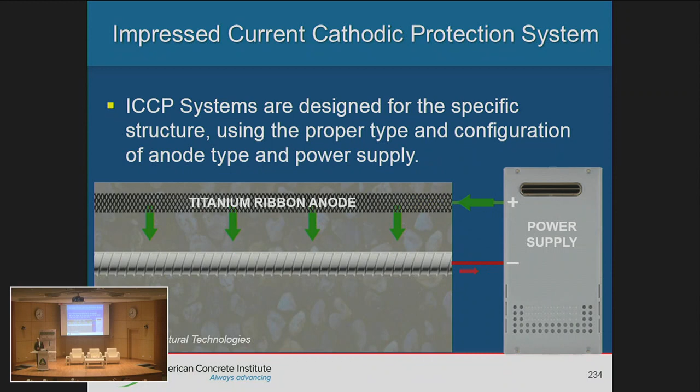It's called the ICCP system, or Impressed Current Cathodic Protection System, where you have this titanium ribbon anode which is embedded into concrete, and you have an external power supply. The bars are connected to that power supply, as is the titanium ribbon anode. So once this power supply provides energy as needed, when the bar loses energy, it's supplemented by the power supply to the bar, protecting it from further corrosion by providing additional energy.

Maintenance program. So what is maintenance? Maintenance is to restore or improve a concrete structure, its services and surroundings to currently accepted standards and to sustain the utility values of the structure.

So we as humans, every year we go to the doctor, right? To do a checkup, to make sure that we are fine. Are we sick? No, but we do what we call maintenance - we maintain ourselves. Structures need the same thing. If you maintain them, they will live longer. If we humans don't go to the doctor periodically, somebody can get sick and not know it until it's too late. The same thing with structures - you need to maintain them, make sure they are behaving or being well maintained.

So there are different examples of maintenance operations. You have condition-based maintenance, where after doing your maintenance you find there are issues within the structure, so you go in and fix it. Fixed time maintenance means, for example, every 2 years you fix and make sure the structure is working fine. Preventive maintenance means doing it before things deteriorate.

Shutdown maintenance, for example in plants, automotive, they have 2 shutdowns a year - what we call the summer and winter shutdowns. That's when they change operation. They shut down the plant and go in to find if there's any deterioration or any work needed for maintaining it.

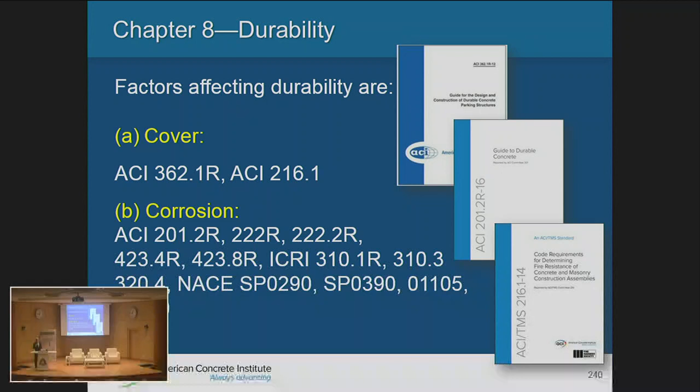Again, there are quite a few documents, ACI and non-ACI documents. For example, you have the NACE, which is a very good document. You have the SP, TR, and you have ICRI, the International Concrete Repair Institute - a sister-type company within the US that handles repair from the practical aspect, covering cracking and how to evaluate the structure. There are also standards for surface treatments, like ACI 515.

Let's talk about construction work. Construction is ways and means - it's by the contractor. The code does not tell the contractor how to do the work itself, but there is some interaction between the engineer and the contractor. For example, if there is shoring, the contractor comes in not knowing what the loads are - the engineer did the work and the calculations. So, as I mentioned earlier, it's good for the owner to bring the contractor in early so the engineer and contractor can talk together.

The contractor can hire the engineer to design the shoring, but in general the contractor has his own engineer - what we call the specialty engineer - who designs the formwork. So it's good at the beginning for the engineer and the contractor's engineer to talk together to determine the forces and the stages being done during the repair work, for designing the formwork or any other issues the contractor needs to address during his work.

When you put the formwork, you have to look at the overall stability of the structure. It should not be jeopardized as far as lateral loading, axial forces, or changes in the load path.

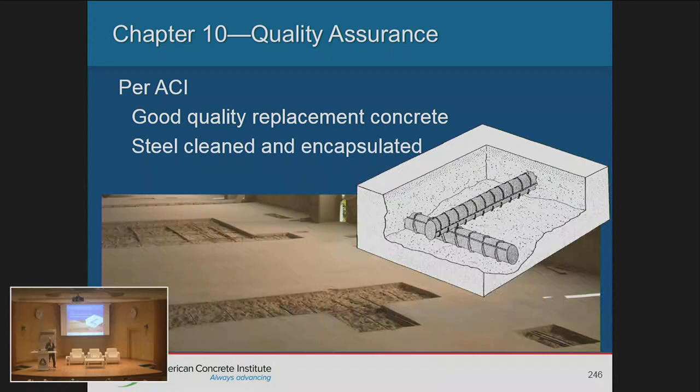When you're doing your repair, it has to be done properly. When you saw cut, it has to be at 90 degrees. You have to come underneath the bar by about 19 to 20 millimeters to engage the existing reinforcement with the new concrete.

If you're applying, let's say, pumping concrete into this upward area, you need to ensure that when you apply the pressure, you have enough pressure and that your formwork is properly designed to take that pressure. You need the pressure so that the new concrete engages with the existing concrete, so that they bond properly together.

And sometimes you may have another opening. If it's large, you pump, it may set. So you have another vent opening where you can pump in concrete from the other side. So there are different methods that the code doesn't address, but where the engineer or the contractor has to think about.

Quality assurance. Quality is very important. You need to ensure that what is being put together is well done, is well built. Because, as we mentioned earlier in that graph from that study, within 10 years, 70% of the repair work fails. So we don't want that to happen. We want to have longevity in our repair work.

Testing and inspection. The engineer should specify in the contract documents what needs to be inspected, what needs to be looked at. The engineer should not tell the contractor to just go to ACI 301 for inspection, because 301 really has a lot of information and issues when it comes to concrete, everything from hot weather, cold weather, all different things. So to tell the contractor to go and do the work per 301 doesn't make sense.

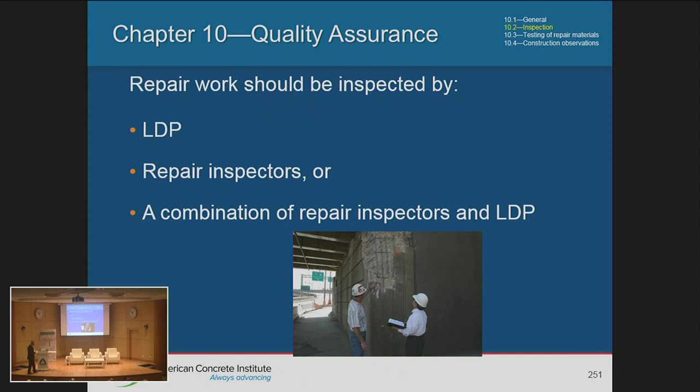So there could be repair inspectors. Those have to be well-informed, experienced in doing that type of work. And currently, there is an inspector program in the US being put together for people who are not engineers to be able to inspect that type of work when it comes to repair. Or it could be a combination of both.

One thing: once a contractor opens up the structure and is doing the work, and once he's done and wants to start to close it, the contractor should not conceal the work before giving the engineer a chance to go out and take a look at it, to make sure that what the engineer assumed is actually correct. Because the engineer did some testing, some inspection, took some core tests, but doesn't really have full confidence that he has addressed the overall issues. He may have overseen something, or once it's opened, more things may be revealed. So it should not be concealed before the engineer has had a chance to look at it.

So it needs to be inspected for location of repairs if different, modification of the design, document changes, and so forth. If there are any changes, they need to be brought to the owner, inspector, contractor, and authorities. Non-compliance, if there are any changes, needs to be documented, showing where those happened, and corrective actions should be taken in case those are severe.

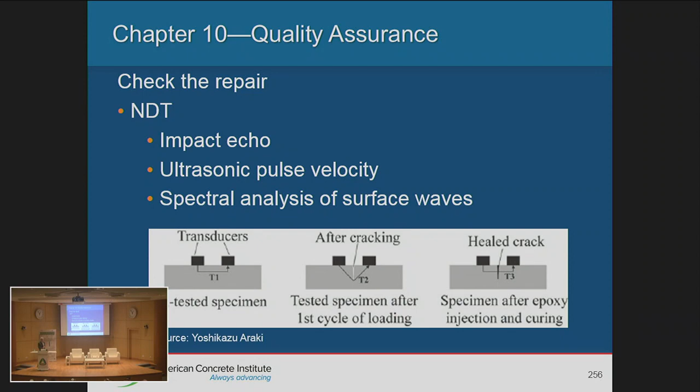So there are other methods to ensure that the repair work was done properly. Test records—you need to maintain those test records.

For how long? It's for the length of time the existing or current code tells you to keep those test records. For example, the IBC tells you a minimum of 3 years. But when does this 3 years start? At the beginning, middle, or end of the project? Actually, it starts from the end of the project, once the contractor is done and gives the keys to the owner. All test documents and reports need to be maintained for 3 years, or per building code or building officials, who may require more. The IBC requires 3 years.

I mentioned 301. 318, when you're doing new design, references 301 for specification. When Committee 562 came up with code 562, they said we also need another specification document specific for repair, so they created 563. So 563 is a specification document specific for repair, with mandatory and non-mandatory requirements for complying with the repair specifications.

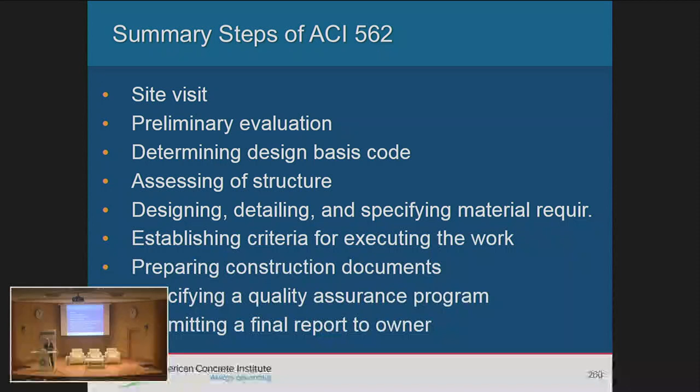We do destructive and non-destructive testing. We do the analysis, which has to follow the as-is condition, and the model also has to follow how we are putting the structure together or how it's being repaired. We put together a criteria for executing the work, prepare the construction documents, put together the specifications, determine what needs to be inspected during the work, and the quality assurance program. At the end, you submit a final report to the owner.

When ACI was putting this code together, they said it's a new code, so we need something to help the engineer with. We talked about educating the engineer about repair, so we thought we needed a guide to help the engineer understand how the code works. This guide has the same number of chapters as the code, chapter by chapter, expanding on the information in the code with more detail and examples. The example I gave you was taken from this guide. At the end, it has 5 full real-life examples that take you from A to Z on how to perform repair.

We have documents for education, which we call the E series. When you see the letter E before the number, it's for education—repair application procedures. For example, it talks about epoxy: what needs to be done, how you evaluate a crack, what equipment to use, how to apply the epoxy, and the finishes. Now the committee is updating all those repair application procedures. We have 14 of them.